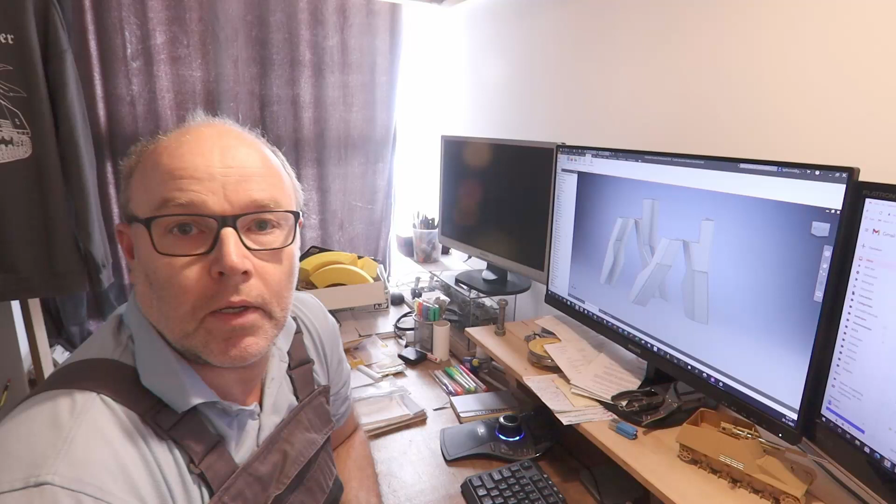I'm Rob, and today I'm gonna work on parts for the cradle, for the elevation system. And since normally a drawing like this, sheet metal, you make it in such a way that you can unfold it. But if I unfold this one, then it doesn't work because the way I drew it up is wrong for the computer program to be able to work with it. So I'm gonna copy the faces, and then on paper I'm gonna write down what I

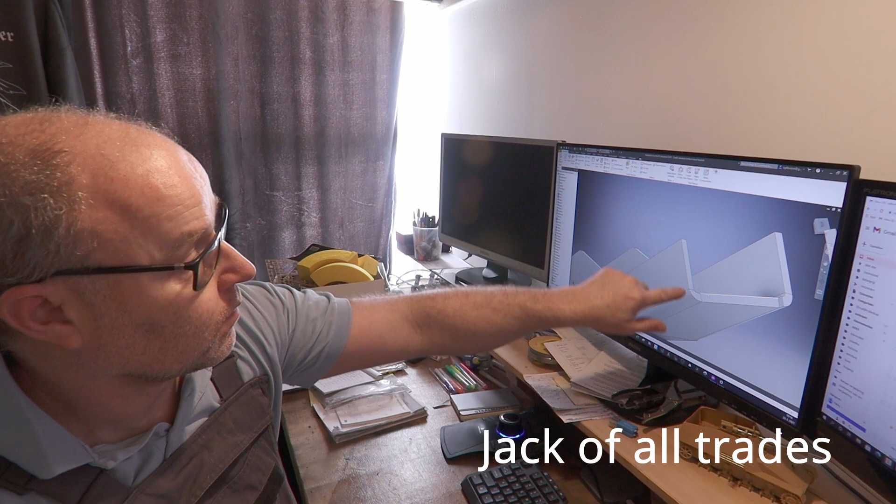need to add, because here I have a little opening, and the curve here, this part where the straight edge stops is about 3 millimeters from this flange, so I need to add about 3 millimeters to be able to assemble it correctly. And there are a few little things like that I need to add, and then I can make it, just cut it out from sheet metal, and that's it. So that's what I'm gonna do now.

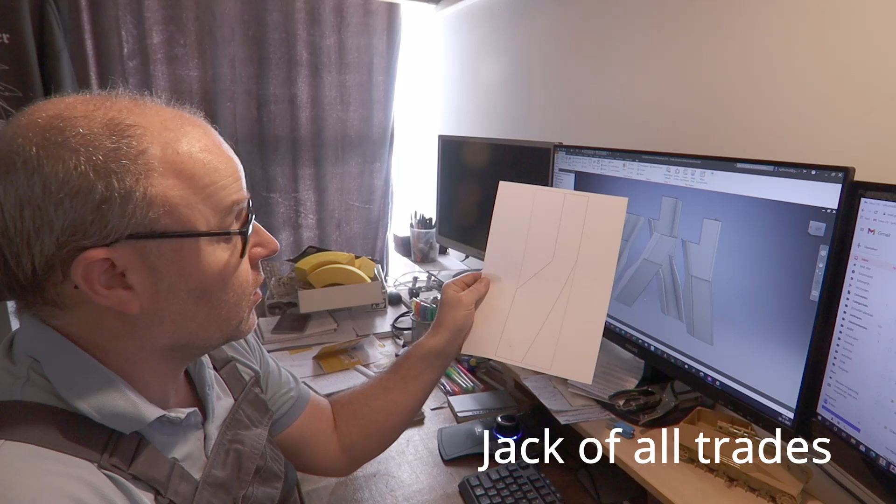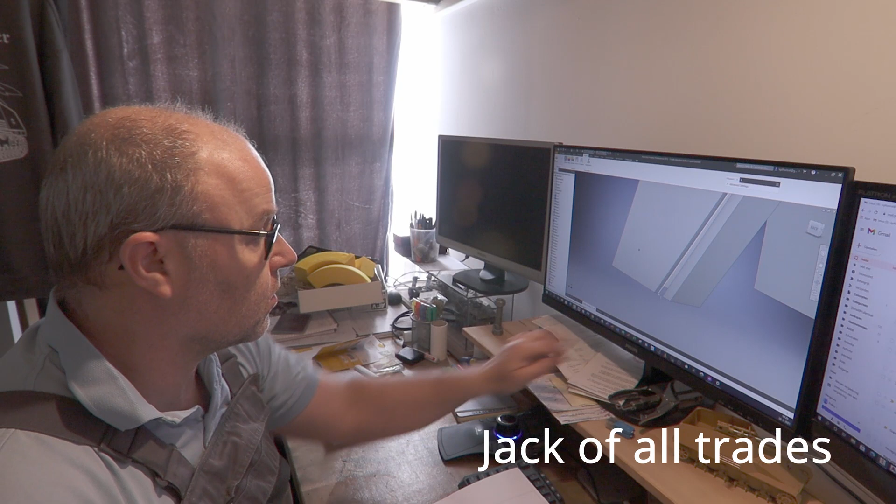I have printed a test sample to see if the measurements are correct. I printed scale 1:1, and it is from this side, this one, and you can see a little opening here, so I can measure that, and that's from that point to that point, and it's about 3.7 millimeters. So I would have to add it, and then I just write it on the drawing that I need to add that much.

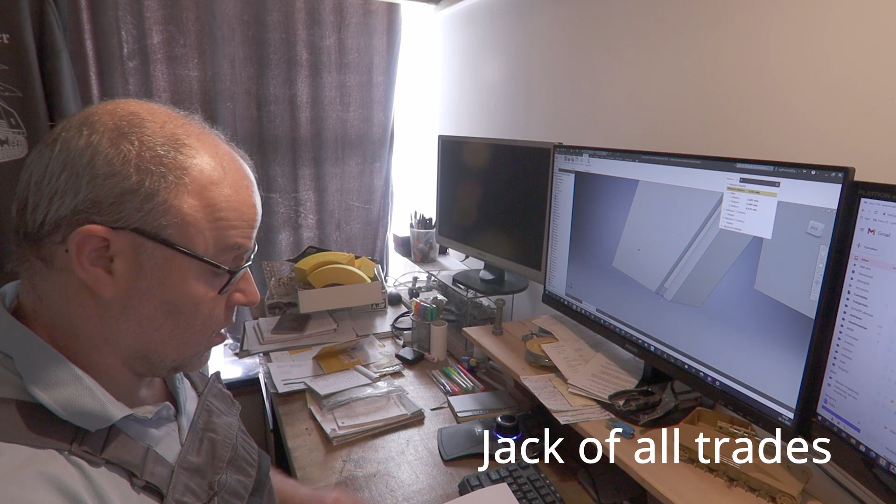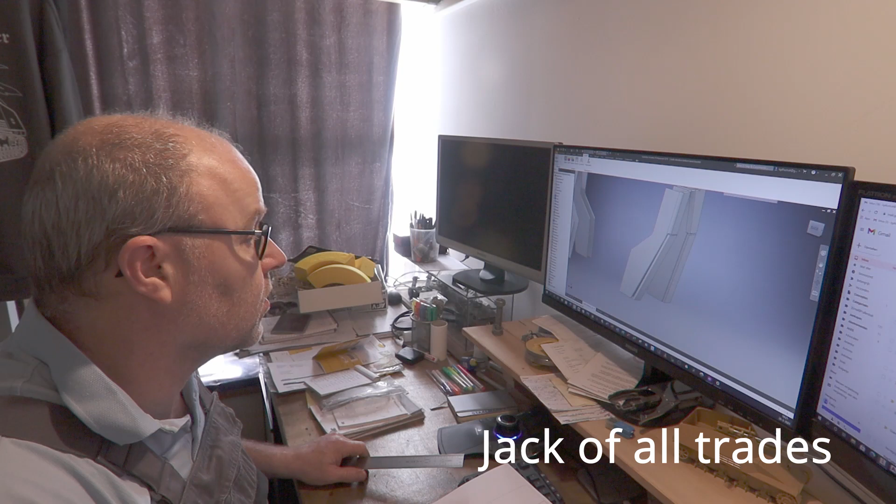And I'm gonna measure some lengths just to see if it's correct. 41, that's correct. 185, that's correct too. So I can assume it's scale 1:1 now. Do one more on this side. 38. And that's also the same.

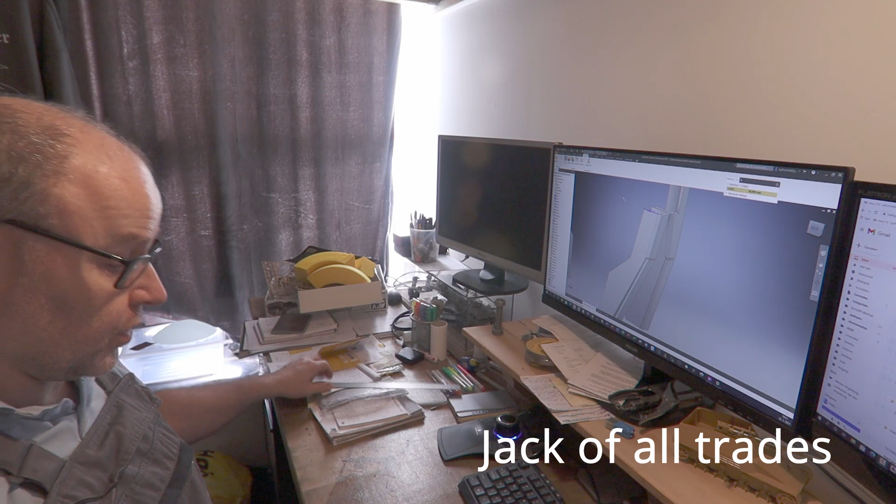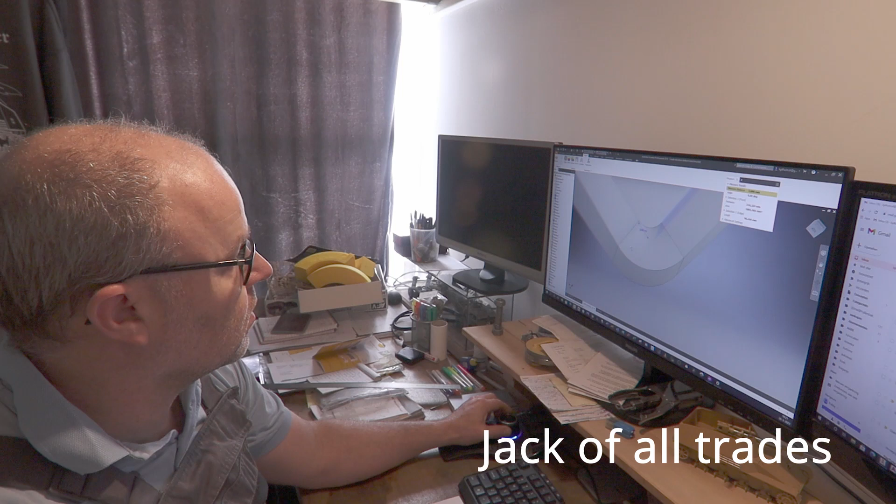So you see here a curve, and if I measure from that surface to about there, it's about 3 millimeters, and I can see where it measures it. So I add 3 millimeters to the sheet on that point, and then it should be okay.

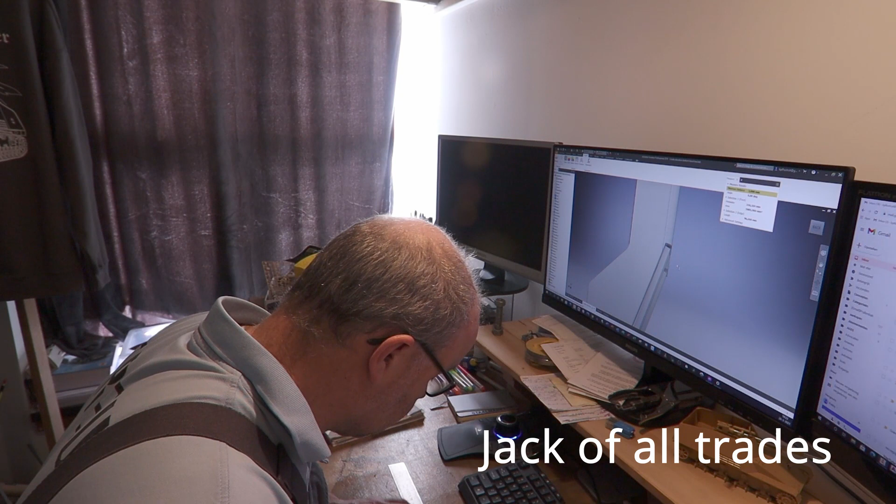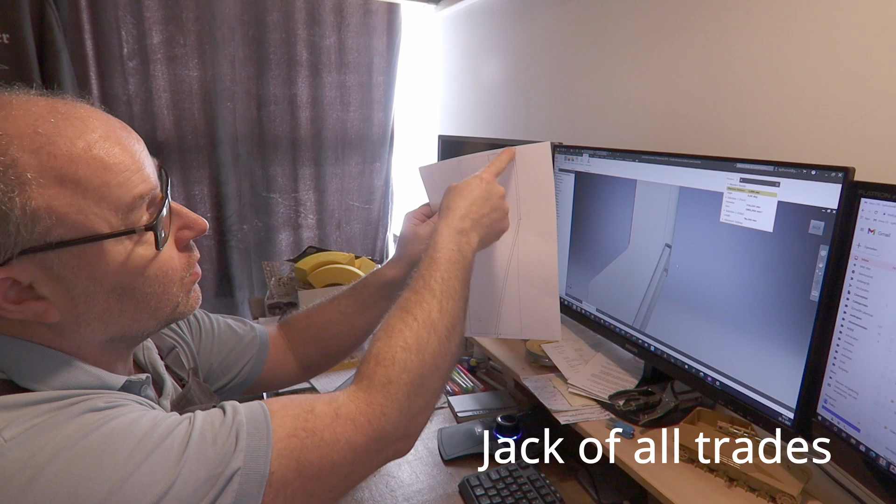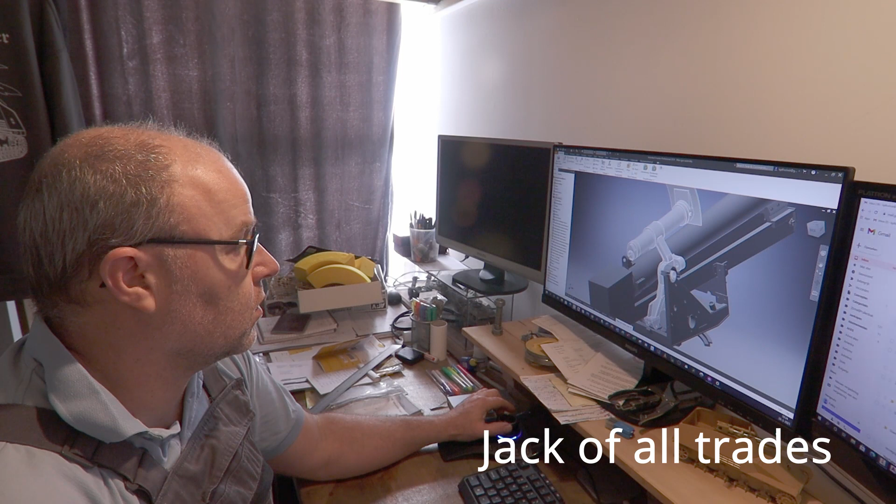So on the drawing I added the dimensions, and if I cut out these lines, it's the parts that I need, so I have to do it to the rest as well, and then I can start on the elevation part. I'll show you the entire part. Let's see where that drawing is. This part, because this is what I need. Cradle elevation. I was looking for just elevation, and this is the part. So I'm gonna look to make this today. Gonna finish all the printing.

So I made all the printings and adjustments. Made this one as well, so I know which part goes where. And then for the other side it's all a mirror image, so I can cut the sheet metal and then just turn over the sheet and tack weld it to the rest of the part. So now I can cut it out. Got a big stack, little extra material, so cut this part out and then I can cut it from the sheet metal. See you later.

Hello guys, I'm at the workshop now. I'm gonna mark it up on this sheet, 6mm sheet metal. Got all the parts, need 2 of each, and then I'm gonna cut it with the grinder because the compressor I have here is too small to cut all these parts because it's a lot of small pieces. It can't keep up with the plasma cutter, and it's a lot of work to set it up on the other side, so I'm gonna cut it with the grinder. But first, mark it up.

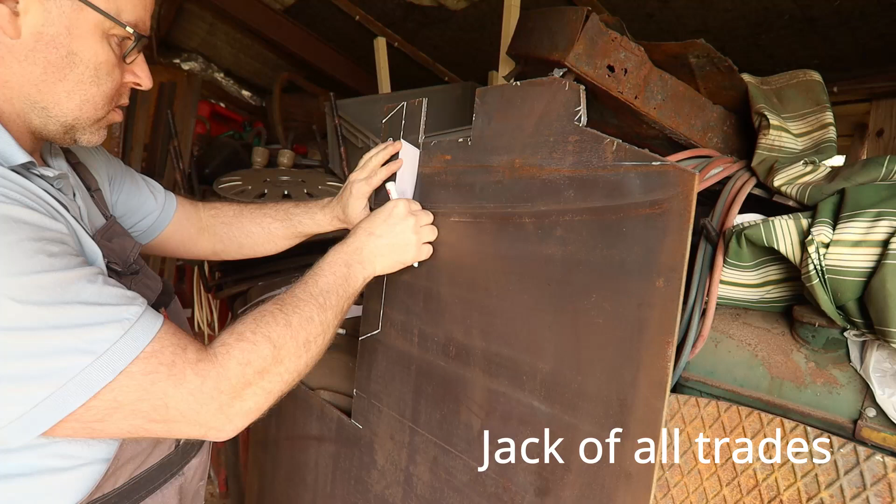So that was the last one. Now cutting. So I have protected the camera from most dust, but I'm not going to film everything. I think you will get it after a few pieces, and I'm gonna put the camera away to protect it. So let's grind.

First piece. I see two different discs. I don't know what it is about this disc, but it doesn't cut as well as this one, so I'm gonna throw this one away or save it for other material. And I just thought of it, we have a mask for grinding, but I didn't have the batteries for it. We lost them in the fire, but I got replacements now, so I'm gonna get it first.

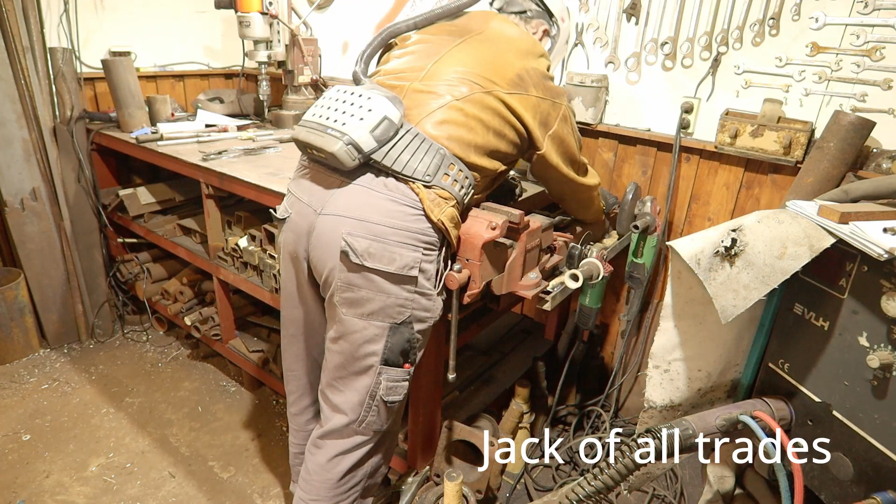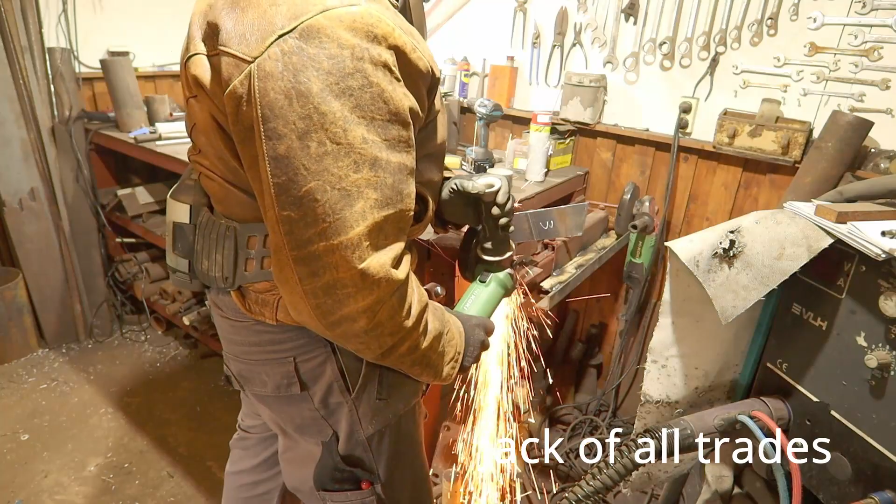Got the pieces cut out of the sheet, but still have some leftovers to cut off, so I'm gonna do that next. The last phase is cleaning up the edges and preparing for welding.

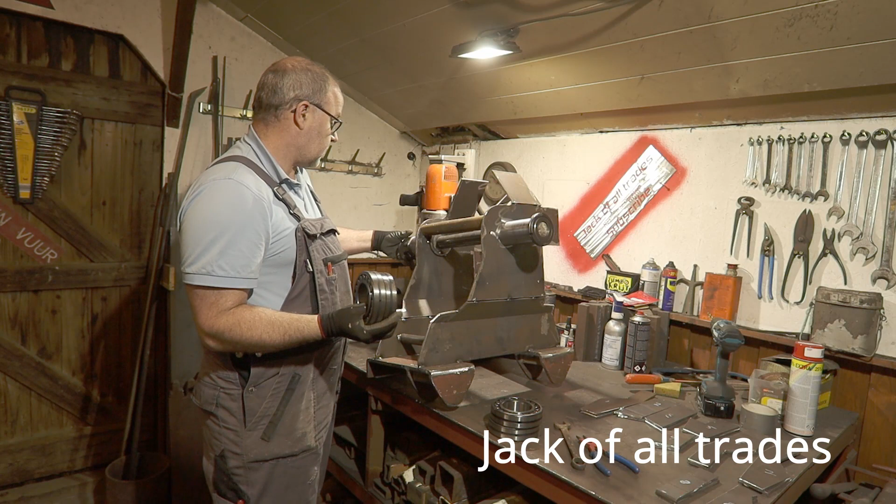It's a bit of a loose fit, but I'm going to use some Loctite to secure the inner race to the shaft, to the trunnion. Otherwise, when this starts to spin, it would destroy this. But obviously it only moves a little bit up and down, so that shouldn't be a problem anyway. So I'm gonna put them away like this so they will stay clean, and then I put them in the cupboard.

So these are the parts that I'm gonna make. So one side and then the other side. This is pointing forward, so I need to turn it around, and this is forward of the gun. This stuff is anti-splatter liquid, especially for the trunnion, because the bearing sits on it. If splatter comes on it, you can wipe it off very easily.

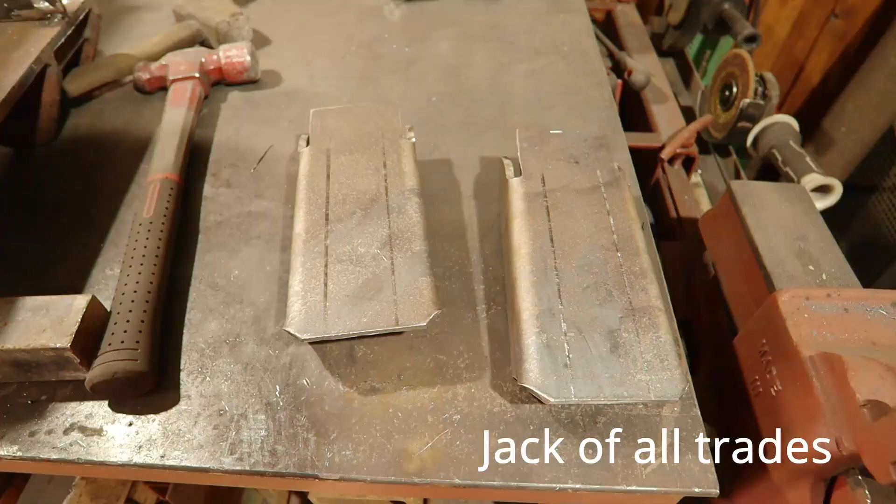Got these two pieces bent at work today. So now it's time to bend this piece to this curve. So I weld a little bit, bend it a bit, and I weld it a bit more. So that's one piece.

I have tack welded two pieces on. It's more clear what it is going to be. I also welded the top tube on, which is a type of gas tube, which you also have on the hatch of a car. When you close the hatch it compresses, and when it opens, it pushes it open, and this is to push the barrel back in place.

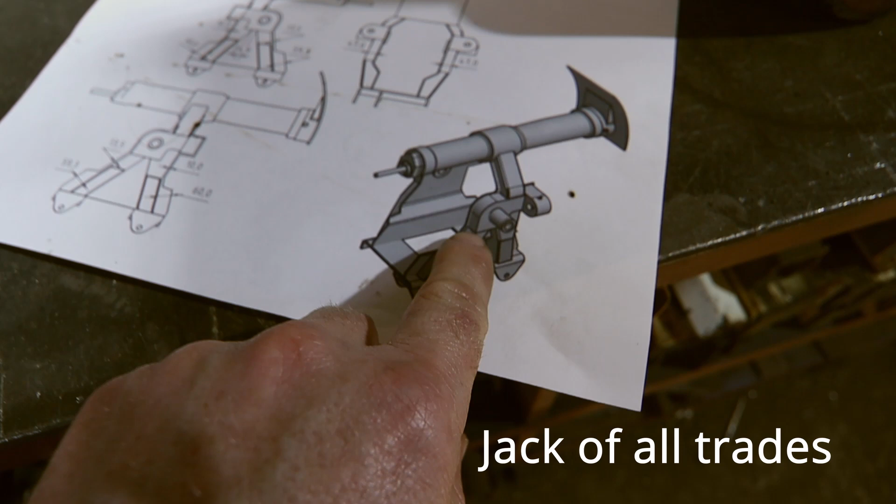It's also more clear the shape of the blocks that are going to be made. I'm going to cut them by laser at work, and it's that block and that block. That block is for the shock absorbers in front, and that's for strengthening the trunnion. But that will be for the next video.

So that's it for this show. Parts are tack welded in place. I cut out the other piece, and hopefully this week I have some time to bend it at work.